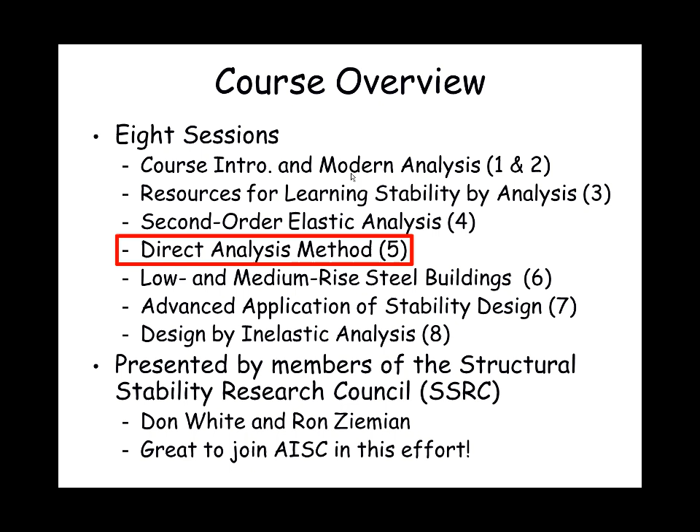In this session, we'll first focus on an overview of the key concepts associated with the AISC Direct Analysis Method. Then next, we'll review specific details of the AISC Stability Design Methods with particular emphasis on the DM. Then in topic 5.3, we'll look at important considerations related to modeling of nominal out-of-plumbness effects in ordinary building structures. We'll then focus on a specific single-story multi-bay frame example to get a better understanding of how the direct analysis method works in topic 5.4. Next week we'll look at a multi-story building frame, and then the following week we'll look at some other structures and applying direct analysis method and other methods. And then tonight we'll wrap up with topic 5.5 in comparison to test simulations with a single-story frame that we're going to study.

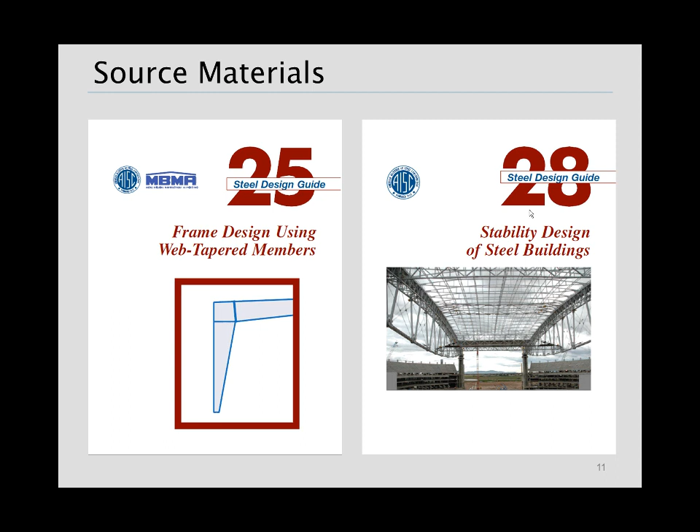Similar to last week, much of the background to the presentations comes from AISC Design Guides 25 and 28. So these are good companion reading materials. And let's get down to business with the first topic.

Chapter C of the AISC specification lists 3 sanctioned methods of stability design: the direct analysis method, the effective length method, and the first order analysis method. The first order analysis method is really the direct analysis method with embedded second order elastic approximations that are conservative up to the limits of the use of the method. So that's all I'm going to say about the first order method tonight. We'll focus on the direct analysis method and the effective length method in the remainder of the discussions. The AISC specification gives the direct analysis method as the preferred approach, and we'll try to understand why that's the case as we go along.

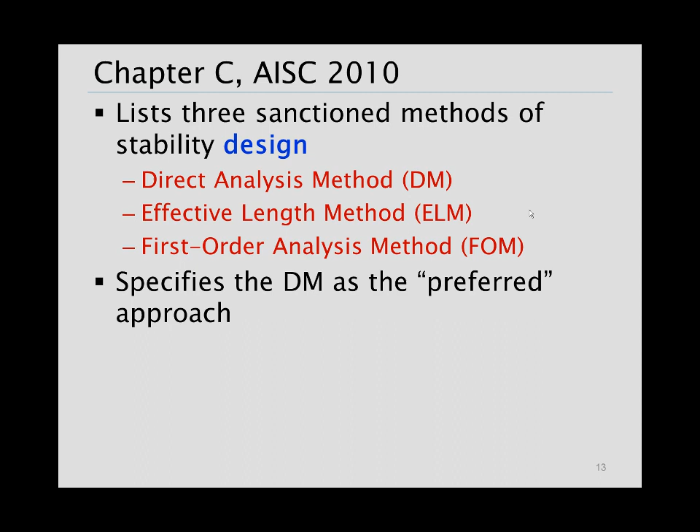First, a couple of notes about what design means. Basically, it generally means selection of a structural configuration. Also, we're looking at performing an analysis of that configuration and proportioning components. So basically, with the exception of Appendix 1, which I think Ron will talk a bit about in the 8th week, all the design methods that we're going to be looking at here have requirements for structural analysis in them, and also rules for checking of the component resistances that are tied to how we do the analysis. So basically, analysis rules and checking of component resistances always go hand in hand, and the rules for checking vary as a function of the analysis requirements and vice versa.

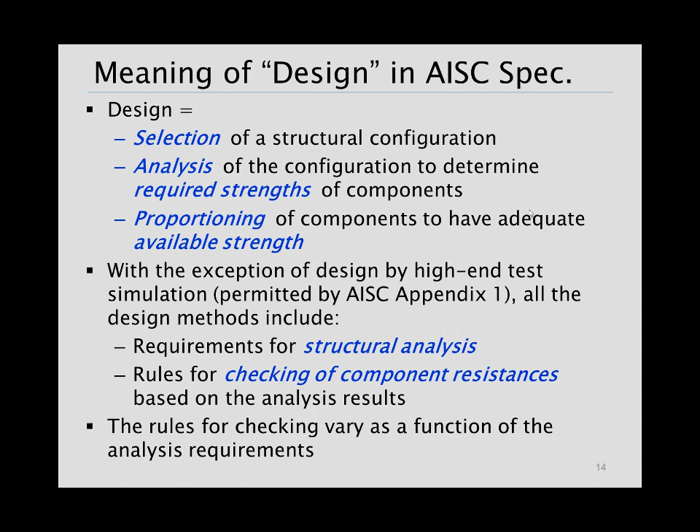So since emphasis is on direct analysis method here, what's it all about? Basically, we're looking at assessment of overall system structural stability, including effects of geometric imperfections and reduction in stiffness as we're approaching the ultimate strength limit state. And we want to do that explicitly in a second-order load deflection structural analysis.

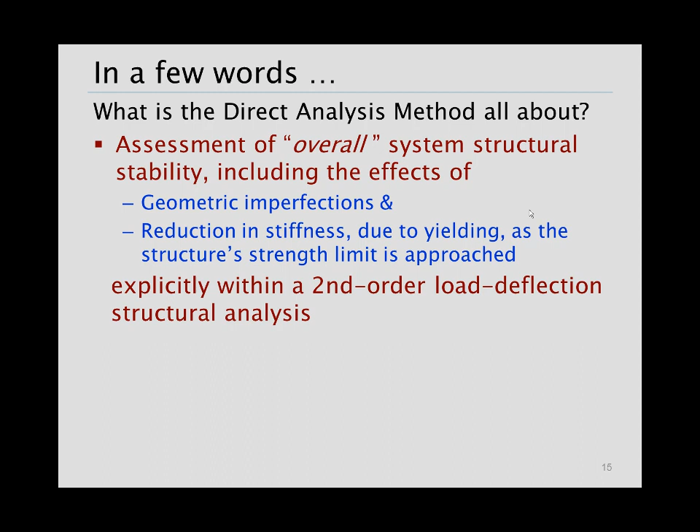Why is the direct analysis method preferred? It's generally more straightforward once you get used to it. By moving some of these considerations over to the structural analysis, we're able to simplify what we do on the resistance side, and so some of the complications associated with effective length factors and their proper calculation go away.

Basically, we take K equals 1 in all cases and treat the members as if they're braced in the resistance calculations. The direct analysis method tends to give us a better, more representative accounting of what the actual real forces are internally within the structure. And the direct analysis method is more general in the sense that we could apply it to sway frames, braced frames, combined frames. All the applications work the same way for all types of structures.

Now, 'considers' is an important operative word. Basically it means that as the engineer of record, if you've considered a particular attribute or effect and you've deemed that it's not important, you've done your job. It's gone. It doesn't mean that we have to take the kitchen sink and throw it at everything out there.

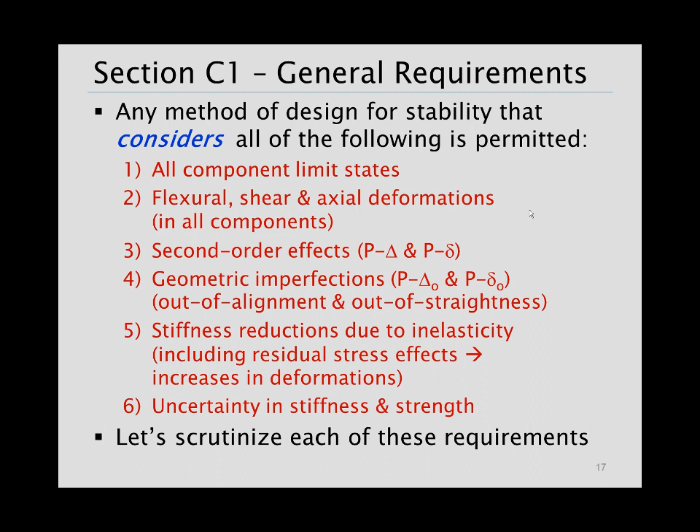Let's take a few slides and scrutinize each of these requirements. So first of all, the component limit states. Basically, we need to deal with the member axial resistance, the flexural resistance, the combination of those in the beam-column unity checks with all the members. And also when we're looking at connections, panel zones, stability bracing, we have to look at the direct limit states that are associated with modes of failure, potential modes of failure for all the components in the structure.

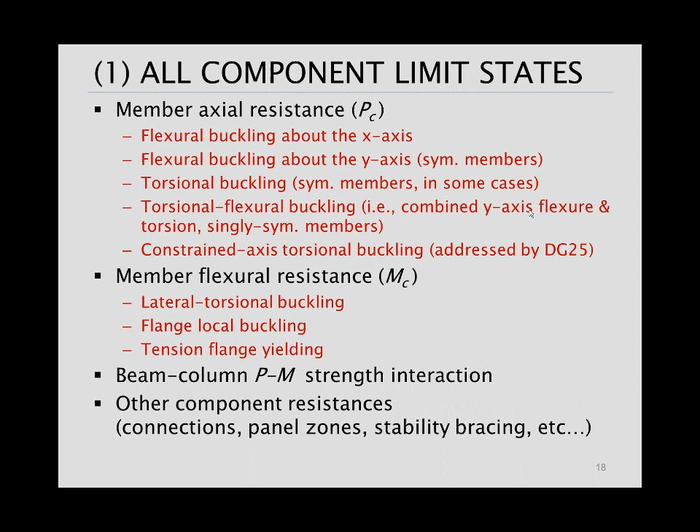There's some definitions on the subsequent slides here, similar to last week. I've embedded a number of definition slides throughout to just basically help you with grasping any of the terms that may be unfamiliar. So let's move on to slide 22.

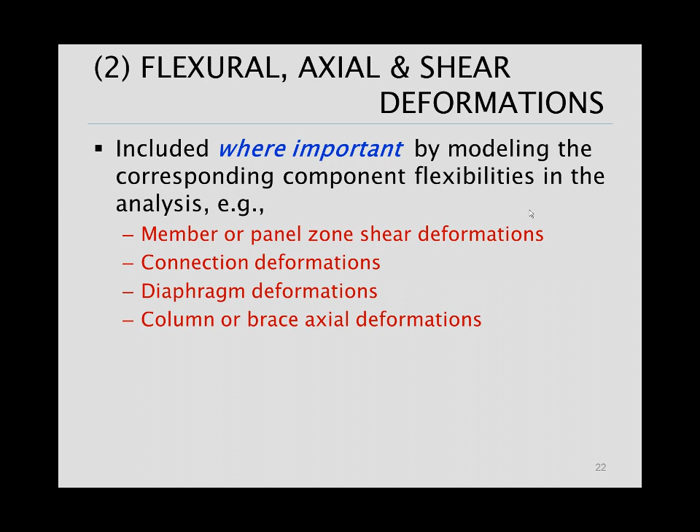Look at the second basic requirement, and that's flexural, axial, and shear deformations need to be considered where important by modeling the corresponding component flexibilities in the analysis. Again, if shear deformation is not important for the structure or component you're looking at, then you need not consider it. But if it's having a significant effect, you should.

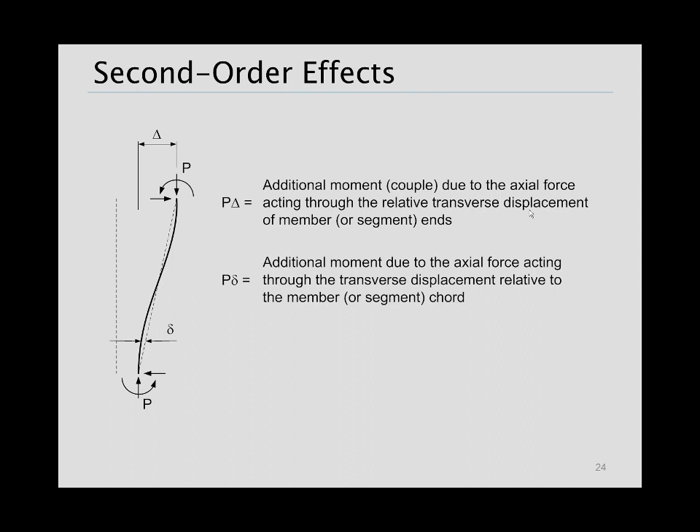We also talked about P-small-delta effects last week. P-small-delta formally we could say is the additional moment due to the axial force acting through the transverse displacement of the member due to its curvature, displacement relative to the member or segment chord. Now, any second-order analysis method is permitted by the specification as long as it's sufficient, and we talked a lot about what sufficiency means, or what we need to do to make sure we're getting sufficient results, last week.

Another important point to keep in mind when doing second order analysis: it's essential to include all gravity or other load effects that influence the structure's stability. Any loads in gravity columns, walls, etc., that are stabilized by the lateral load resisting system but aren't included in the analysis need to be included or have their effect included in some way.

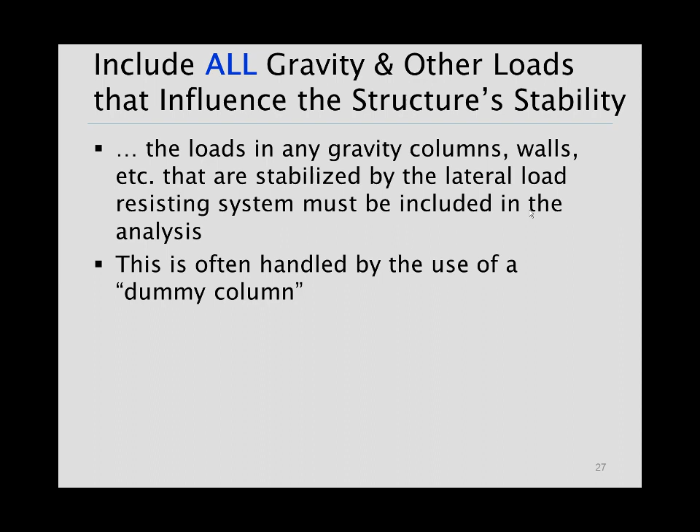This is often handled by use of a dummy column - not a stupid column, but a column attached to the lateral load resisting system of the structure. We pin it at all levels, and connect it by pin struts back to each level of the building structure. Then the total vertical loads transferred to all the columns, walls, etc. that aren't directly included in the structural analysis model get placed on that dummy column. You always want to give this dummy column enough area so you're not squashing it. That's a fairly common modeling approach to pick up all the effects of gravity columns in the structure. We won't look at a specific example tonight, but we will do some specific things with dummy columns in examples next week.

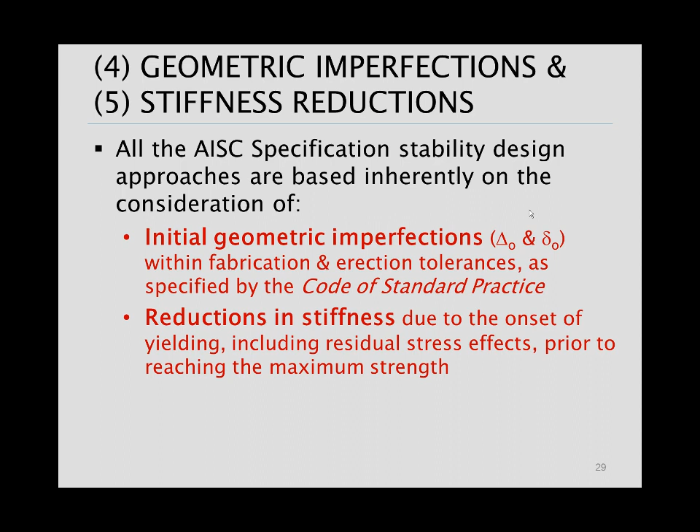About the fourth and fifth requirements from the AISC specification for any stability design method: basically any of the methods have to consider geometric imperfection and stiffness reduction effects, and all of them do. We are dealing with handling initial geometric imperfection effects within fabrication and erection tolerances as specified by the Code of Standard Practice. And reductions in stiffness are also included in all the methods.

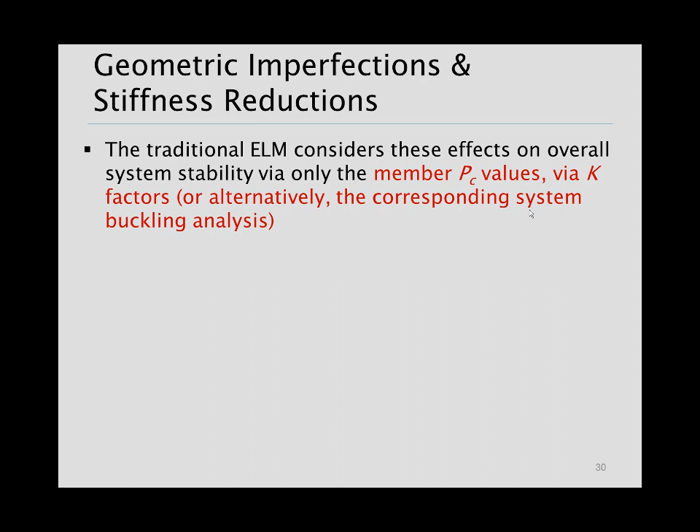In the traditional effective length method, we're handling these effects on overall system stability via only the member axial load capacities, P sub C, in the strength interaction equation, written in generic terms for ASD or LRFD. We do that commonly by calculating effective length factors greater than 1, but alternatively we can do a corresponding system buckling analysis to get the underlying sidesway buckling loads that we can map to column strength - the column strength equations with the K factors, accounting for the imperfection and stiffness reduction effects in the ELM.

This works, and it's worked fine traditionally for moment frames, but only for moment frames and only for the beam columns in these frames. In actuality, since we're only acting on the P sub C term in the beam column interaction check or column equations, there's nothing explicitly showing or handling how the imperfections or stiffness reductions impact your connections, the beams in the structure, etc.

So for design by the effective length method, the 2010 specification also requires consideration of sway imperfections - that would be an out-of-alignment or out-of-plumbness, delta naught over L of 0.002, or 1 in 500. We need to do that with gravity-only load combinations within the structural analysis.

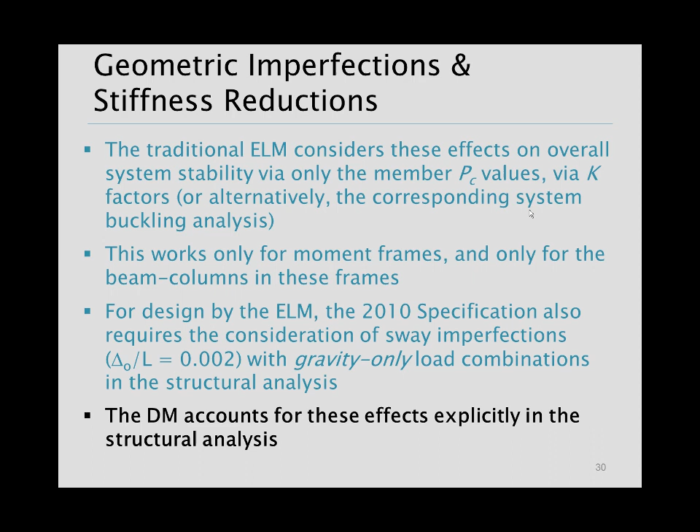The direct analysis method accounts for these effects explicitly in the structural analysis across the board. We're looking at a stiffness reduction effect that tries to handle the stiffness reductions as we're approaching ultimate strength. We're also handling nominal geometric imperfection effects directly in the analysis model for the DM.

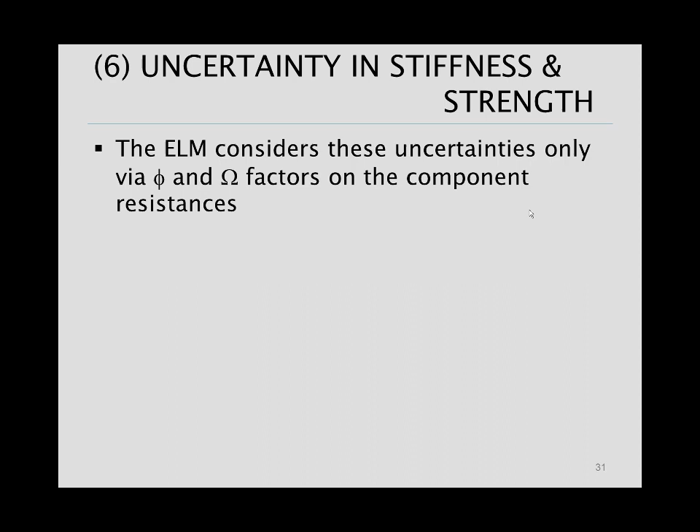Lastly, the sixth requirement is uncertainty in stiffness and strength. The ELM accounts for these uncertainties only via the phi and omega factors on the component resistances. If we go to the DM, part of the stiffness reduction we look at accounts for uncertainty in the structure's stiffness at strength load levels.

If you have a structure that's very stiff and subject to light loads, taking a stiffness reduction on something essentially rigid still leaves something essentially rigid - so there'd be a very small effect. The structure would be insensitive to the stiffness reduction and the overall second order effects. However, if you have a relatively flexible structure subjected to large vertical loads, this stiffness reduction can have a significant effect on deflections and internal forces. This characteristic is captured inherently by the direct analysis method.

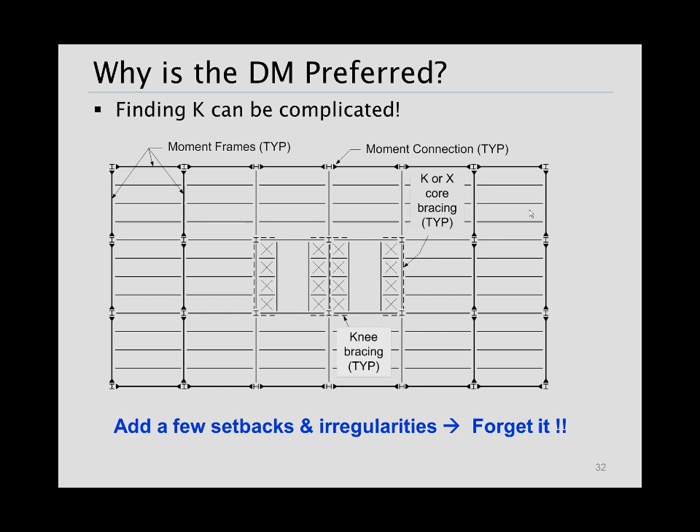Why is the DM preferred? Basically, finding the effective length factor for general building systems with some combination of moment frames and braced frames can be complicated. Even for a nice rectangular box it can be complicated, but add a few setbacks and irregularities, which are very common, and it becomes very difficult to really get it right in terms of calculating the effective lengths.

The physical behavior of even the most basic frames is really never a bifurcation problem, whereas the effective length method tends to use a theoretical bifurcation response as a base. Nothing wrong with doing that, but the direct analysis is arguably a better way.

It basically considers the fact that any structure is going to have incidental imperfections, and so that means that when you put load on it, you always get a general load deflection problem involving the loading and bending of the structure.

So say, for example, if we went in the lab and constructed a nice cantilever column on some base, and we went to load the column by a nominally concentric axial load, well, we can't build that column perfectly plumb or perfectly straight. The Code of Standard Practice out-of-straightness limit is L over 1,000 in terms of the maximum. The maximum out-of-plumbness tolerance is L in 500.

So if we have imperfections in those orders of magnitude, you load with the concentric axial load, you're going to get some bending at the base. And of course, we would want to design that base for some moment in general. So the direct analysis method is looking to calculate the influence of the geometric imperfections on that base moment.

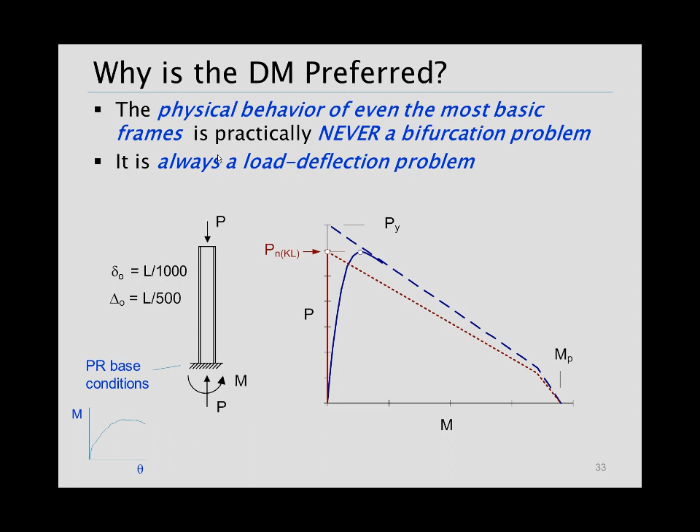With the direct analysis method, we're basically considering even this case as a beam column. Our column and our connection are subjected to axial force and moment, and by doing so, even though it's a cantilever column, we consider it essentially as braced. Some of the things we'll talk about subsequently, we could even consider just the cross-section resistance of the column, as I'm showing you here, with an anchor point on the vertical axis of PY and an anchor point on the horizontal axis of MP.

So in summary here, the basic concept of the direct analysis method: we want to estimate the required forces using a second-order load deflection analysis, and we want to account for nominal stiffness reductions at the strength levels, and geometric imperfection effects in that analysis. Once we've got our force and strength requirements from that analysis, then we are looking to check the member resistances.

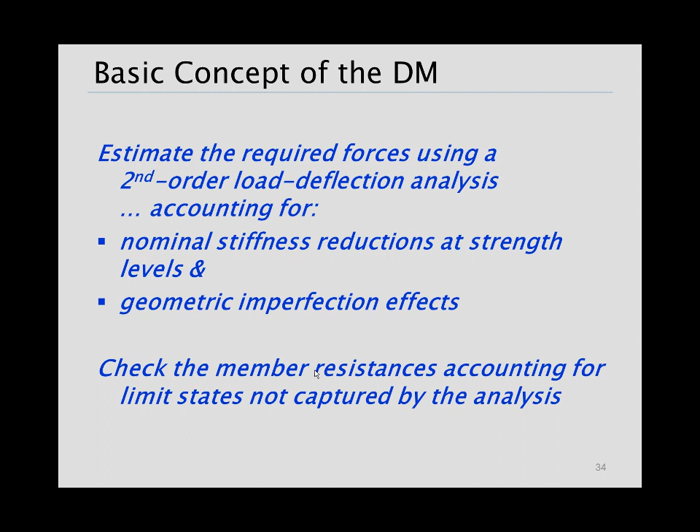And that's where we account for strength limit states. Most of the strength limit states are not captured in the analysis itself. The overall stability effects are captured in the analysis, but the different component limit states we need to capture by resistance equations.

All right, so that brings us to topic 5.2, where I'd like for us to look in a little more detail at specifics of the methods. And then once we've looked at this topic, 5.2 would be a good place we might stop for questions if there are any.

So again, not to belabor the point, but what's the primary distinction of the direct analysis method? We're looking to handle the assessment of overall system structural stability, including the effects of geometric imperfections and reduction in stiffness as we approach the ultimate strength, explicitly within a second-order load deflection structural analysis. And by doing that, that's a little more work for the analysis, but we get a benefit in the strength resistance checks that we do.

We basically don't need to use the K factor, or K greater than 1, to evaluate the sidesway resistance of moment frames. We basically look at design of the members considered as if they were braced in all our resistance calculations.

We're not covering all the bases within the second-order global structural analysis. The analysis generally does not have information built into it that captures things such as the yield strength of a material, or what the different potential failure modes are. So we need to go to our resistance equations, given the required strengths, in order to cover all the bases.

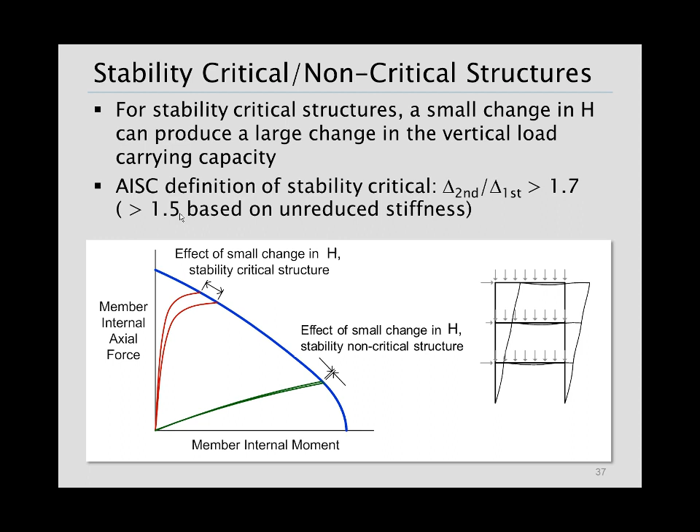The definition of stability critical is basically when the second order amplification, the second order drift over the first order drift, is greater than 1.7, if we're looking at the direct analysis method with the reduced stiffness we're going to be talking about, or greater than 1.5 with the unreduced or nominal stiffness used in the effective length method.

So for the direct analysis method, we're required to model an out-of-plumbness of L/500 for gravity-only load combinations if it's a stability non-critical structure. We can do that with equivalent notional lateral loads if we want. In addition, we're required to use a 0.8 stiffness reduction on all contributions to elastic stiffnesses.

And if we have members with high axial load, we use a column inelastic stiffness reduction factor of tau B on the rigidity of those members. You can see I'm using the same style I gave you last week, where I'm showing equation C2-2b, referencing you back to the specification where any equations I'm using show up.

Now, if we've got other materials than steel, we use 0.8E unless the code requirements for those materials have a smaller elastic stiffness.

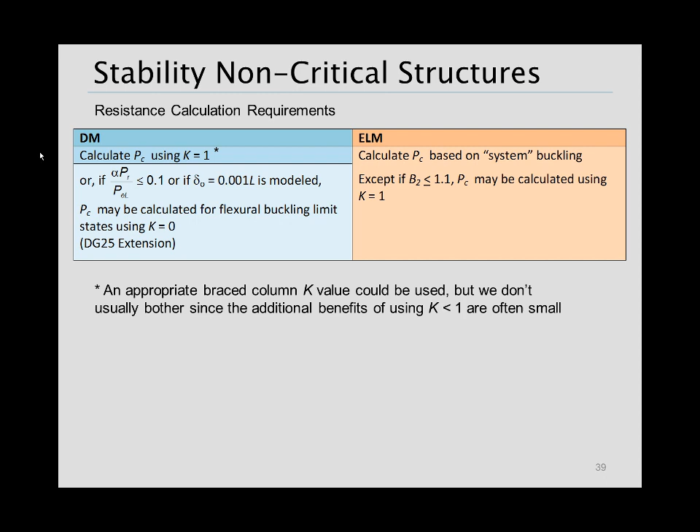A note about stiffness reduction: the elastic modulus E shows up in a lot of our specification resistance equations, often only for normalization purposes. Where it shows up for other reasons, any stiffness reduction effects are already implicitly taken into account in the specification resistance equations, so you'd never reduce E when plugging into those resistance equations.

In addition, the stiffness reduction is basically intended to account for the effects of loss of stiffness as we're approaching ultimate strength levels. That means there's no need to do that stiffness reduction at service load. Also, when we look at the load codes, response spectrum analyses, requirements, or building period calculation, those are based on nominal E, so we generally don't take any stiffness reduction there either.

Now we are required to incorporate the out-of-plumbness effect directly in all load combinations. That's pretty much the only difference there. We've now got a structure where that out-of-plumbness effect could be having a significant influence on the overall load carrying capacity of the structure, and so we need to consider it.

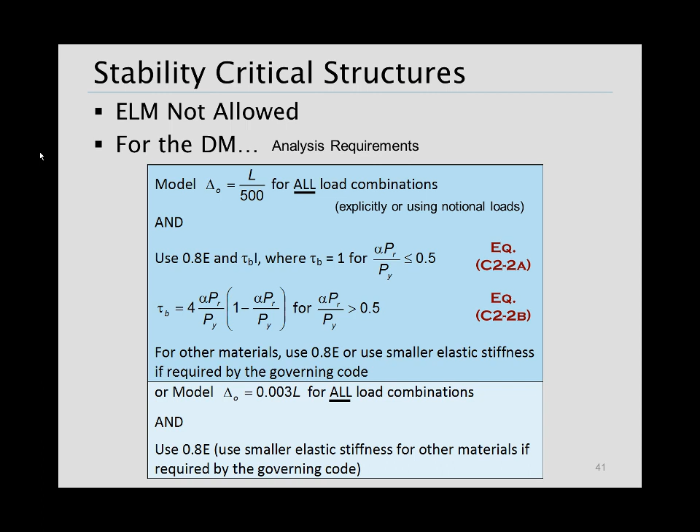As far as the analysis rules are concerned, this is exactly the same as what we had before, so the same requirements that we talked about earlier.

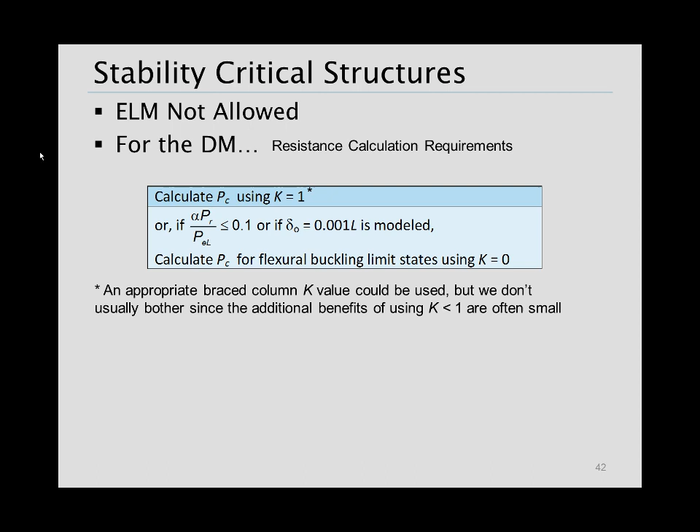Last thing in terms of wrapping up with a number of specifics of the effective length method rules and the direct analysis method rules: why do we use the column strength calculation P sub C based on the actual unbraced length L, or K equals 1, in the direct analysis method? It's important to understand this to have your head around the whole process we're working with here.

The basic reason is to capture all the bases for situations where you could have a structure you're checking where, for some reason, you have a very light column or beam column subjected to large axial loads. In that case, the rest of the structure, either braced frame or moment frame, could be stiff enough where it's essentially preventing the sway of this light member. But this light member, if it's light enough and heavily loaded enough, could essentially get crunched in a non-sway buckling mode. To cover the bases with that and keep things simple for routine analysis, we use K equals 1, or P sub C based on the actual length.

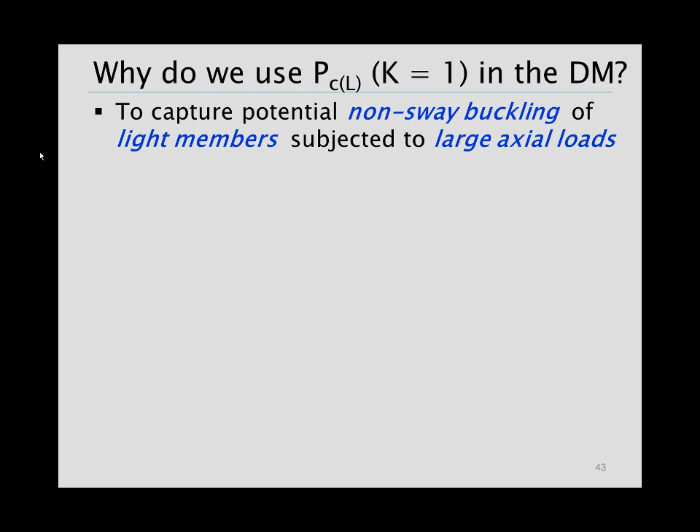Now, there's an alternative procedure from Design Guide 25 that's an extension I talked about a little bit in the tables I gave you, and some of these extensions are being considered for addition to the specification in 2016. Basically, the flexural buckling axial resistance, either PNX or PNY, can be taken as PN based on L equals 0, or in the current spec, that would be our form factor Q times the yield load PY.

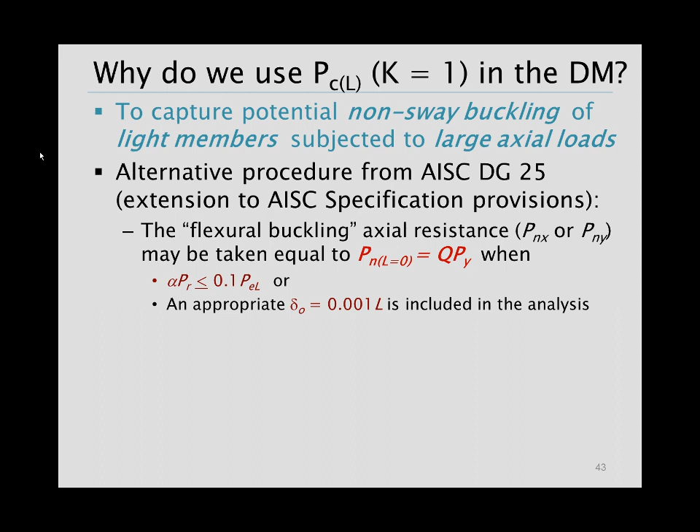This applies if alpha PR is less than 10% of the Euler load in the direction of buckling, or if an appropriate out-of-straightness is included in the analysis. That can be a bit of trouble for routine structures, so we don't usually want to bother with it there, but there are other cases where it can be very useful to do that.

Now, when it comes to torsional, torsional-flexural, and/or lateral torsional buckling limit states, we still need to do the strength checks with PN and MN using the actual unbraced lengths. The reason for that is that the direct analysis method really doesn't have the resolution to be able to capture these limit states in general.

As we were just talking about last week, most design software does not include the consideration of warping rigidity, so we're somewhat limited in being able to really do an accurate characterization of torsional, torsional-flexural, and lateral torsional buckling limit states.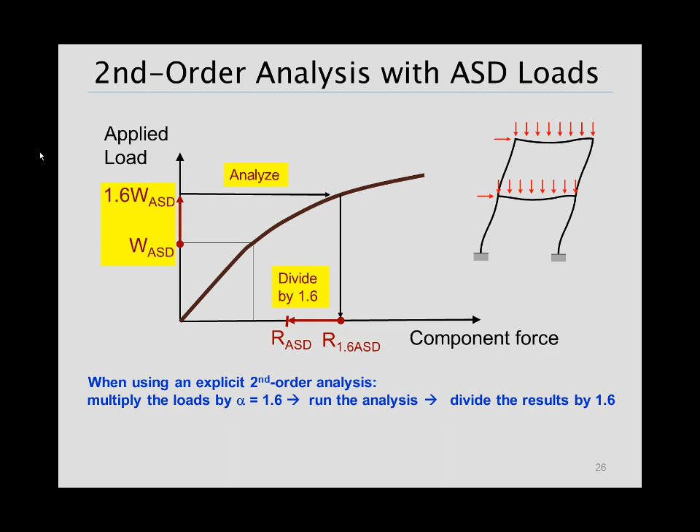Well, if you're using an amplified first order analysis, then it's not quite the same gymnastics we'd have to do with a general purpose analysis. And if you have that sort of structure, you could come back to laying out things generally. If you're looking at a structure and say, hey, I've considered second order effects, and they're negligible in this problem, as long as you're right, you're good.

So you could approach it from that sense. In the general sense, basically, if there is a measurable second order effect, we need to capture that effect at the ultimate strength load level. So that's why we have to do these gymnastics.

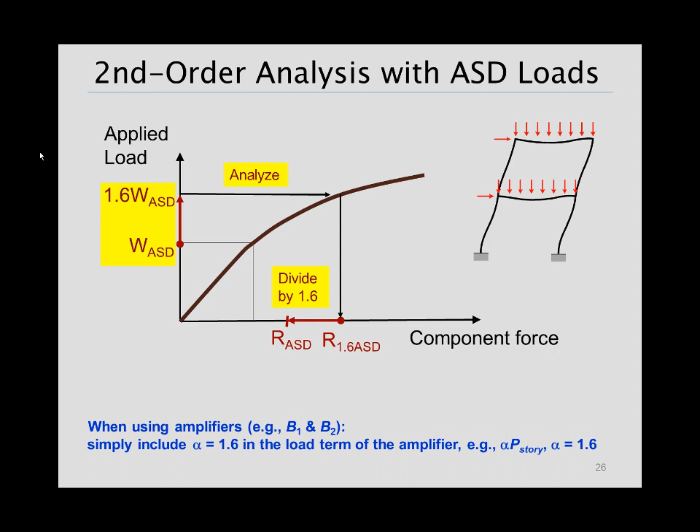Now, for the direct analysis method, are phi and omega not applied to member axial and flexural resistances? Of course. In the direct analysis method, you're basically picking up uncertainties in stiffness and strength in the application of phi or omega to the strength component terms, but you've handled the overall side sway effects in the overall analysis. So when you're looking at resistance checks, the side sway effects have already been handled, and you're looking at each component as if it's a member, as if it's braced, you could say.

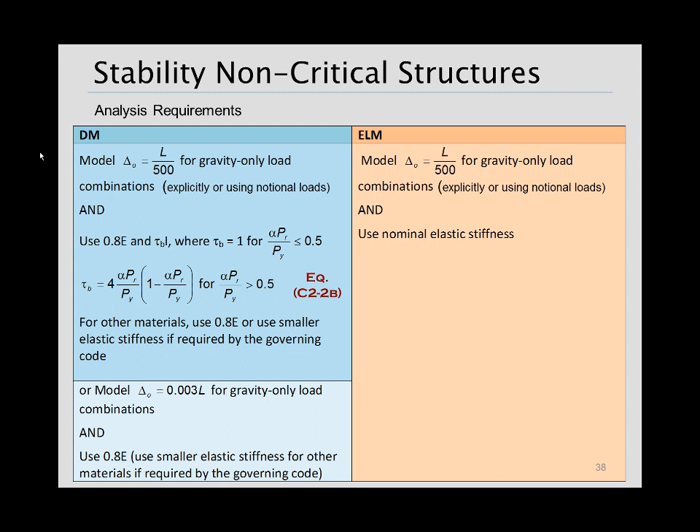The question is in regards to reducing the stiffness. Do we have to use the reduced stiffness E when calculating drift for second order analysis? Yes.

Ron used a term, and I'll probably mention it again later tonight, that the direct analysis method is kind of a poor man's test simulation analysis or test simulation check. And so that stiffness reduction is to account for the fact that as you're approaching ultimate strength limit, you are losing stiffness in the structure. It's a very coarse accounting for that effect, but it is required.

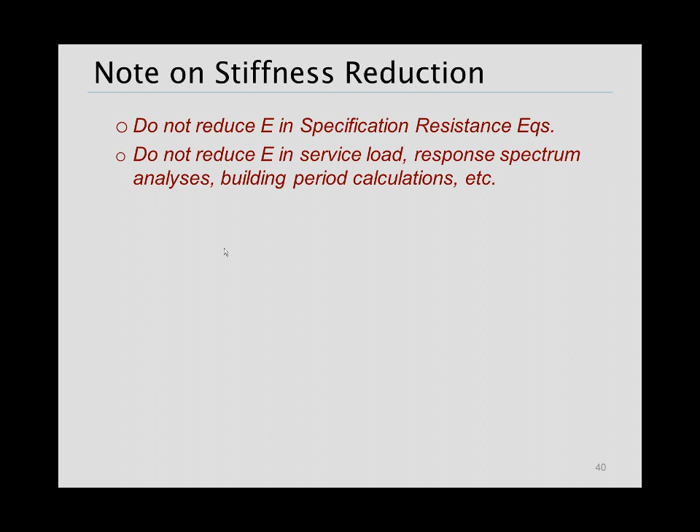So topic 5.3 basically looks to dive down in a little more detail on this one aspect, and that's the modeling of the nominal out-of-plumbness in typical building structures. That out-of-plumbness is based on delta naught of L in 500, which comes from the maximum tolerance in the AISC Code of Standard Practice.

My preference is to explicitly model that out-of-plumbness in the frame geometry, but if it's not facilitated by the analysis software, it's kind of a pain in the neck to do that. The reason I prefer this is that if there's any questions about what my notional lateral loads are, I always have to go back to the out-of-plumb structure to figure it out. So things are conceptually cleaner, easier to understand, and easier to automate in terms of programming by just canting the frame.

Now with that said, I know that most software providers prefer to use the notional lateral load. Reasons for that: notional lateral loads have been around in other international design codes much longer than in the AISC specification, so many providers already had notional lateral load generators written to service other codes. The other thing is that a notional lateral load is handled on the right-hand side of your equations for your matrix stiffness, direct stiffness analysis.

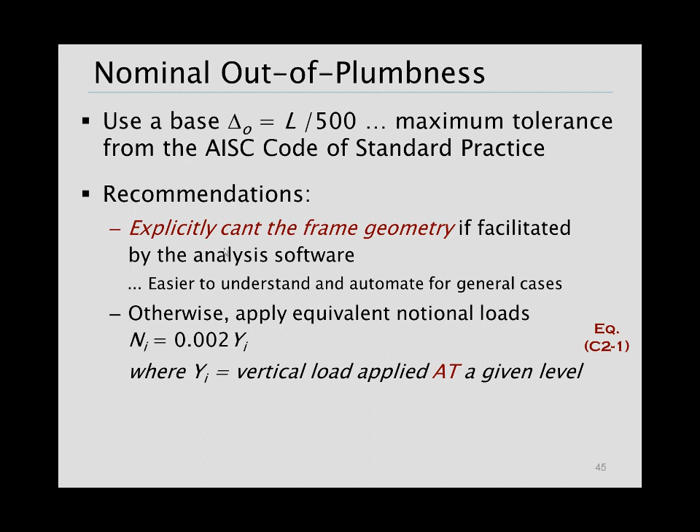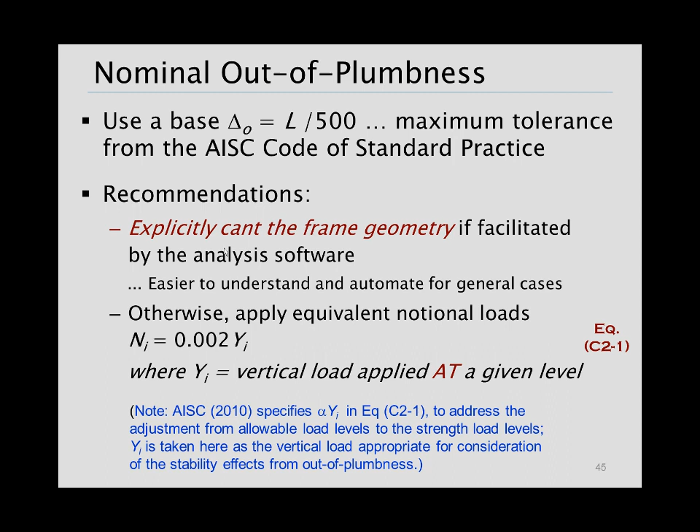Now the notional load equation is equation C2-1. The notional load is 0.002, or 1 in 500, times y sub I, where y sub I is the vertical load applied at a given level. The specification equation shows alpha y sub I, but here in my presentation and in Design Guide 28, we just use y sub I representing the load at ultimate strength that we need in the equations—so just a bit different terminology, don't let that throw you.

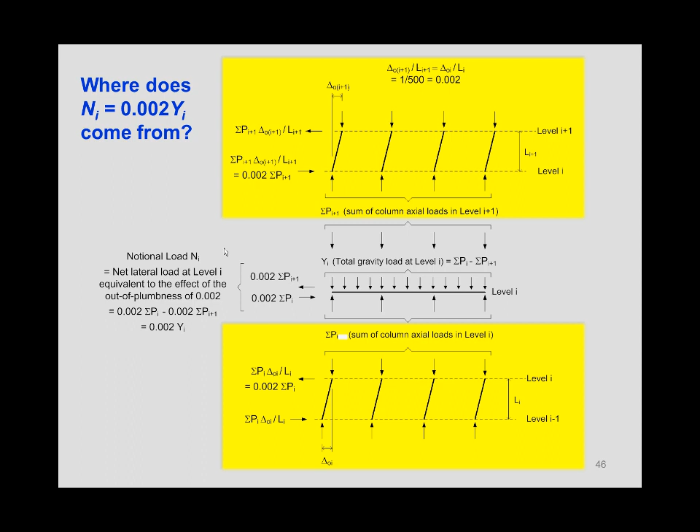Where does this notional load of 1 in 500 y sub I come from? This slide helps explain that. Basically, for a given story level, we look at the stories above and below. At the top story, if we have an initial out-of-plumbness of delta naught I plus 1, then the P-delta shears associated with that out-of-plumbness are shown here. Now if we go to the story below, same deal, but now the loads are P sub I, and suppose we've got the same delta naught over L showing up at this story as our base assumption.

Now let's apply Newton's third law—we look at equal and opposite reactions coming from above and below at the story level. If we sum those, the notional load is basically that sum. Everything cancels out so that what we're left with is just the load that comes in at this level. We use that and put it on the structure as a notional equivalent lateral load at each level.

Now, where do we put these loads? If we've got a structure with flexible diaphragms, or any case where the position of the vertical load in plan may have an important stability effect, then y sub I would be considered as the vertical load transferred to each column at a given level, and the notional load would be applied at each of those locations in the corresponding plan. So you can always go back and say, let me look at every place where vertical load comes onto the column, and put a notional load there.

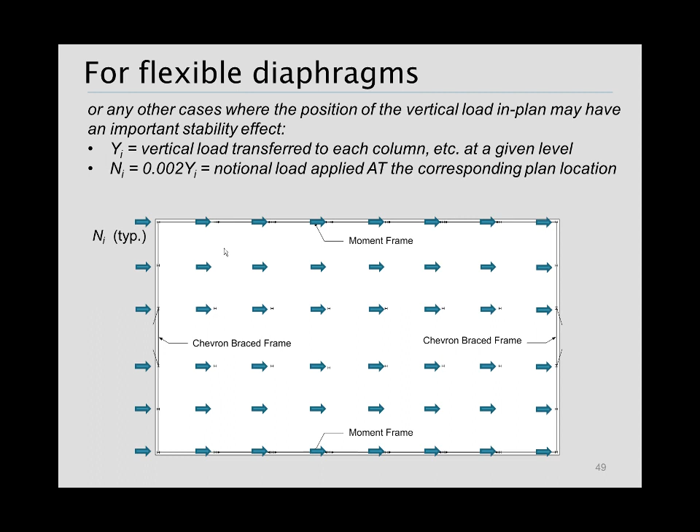It's more convenient if we've got a structure where we're allowed to model the diaphragms as rigid—just get a total vertical load coming onto the structure at a given level, and apply the corresponding notional load at the center, or centroid, of the overall vertical loading on the frame.

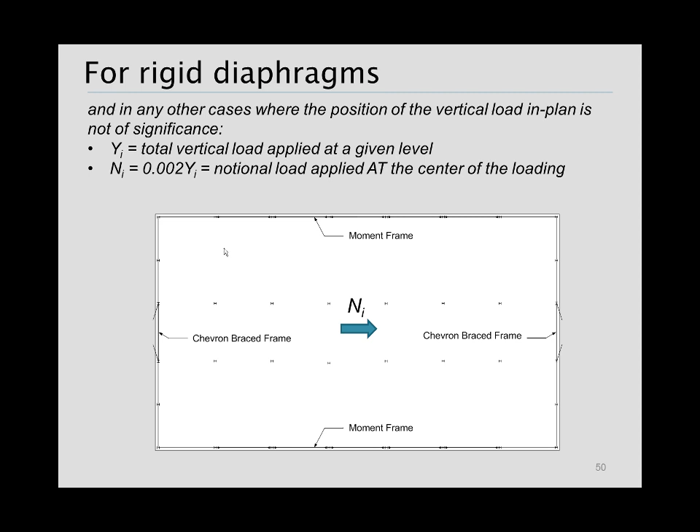In terms of what direction we apply the delta naught over L, or the notional load, the spec says apply it for greatest destabilizing effect, which isn't all that difficult, but does require some thought. We'll look at this further in the following slides.

In terms of the pattern, for structures up to about 7 to 10 stories supporting gravity loads primarily through nominally vertical columns, walls, or frames, the critical pattern is just a uniform lean of the structure, delta naught over L, all the way up the building—or the corresponding notional lateral loads that go along with that. For taller structures, Design Guide 28 has an appendix discussing how you might consider out-of-plumbness on just a certain group of stories at a time.

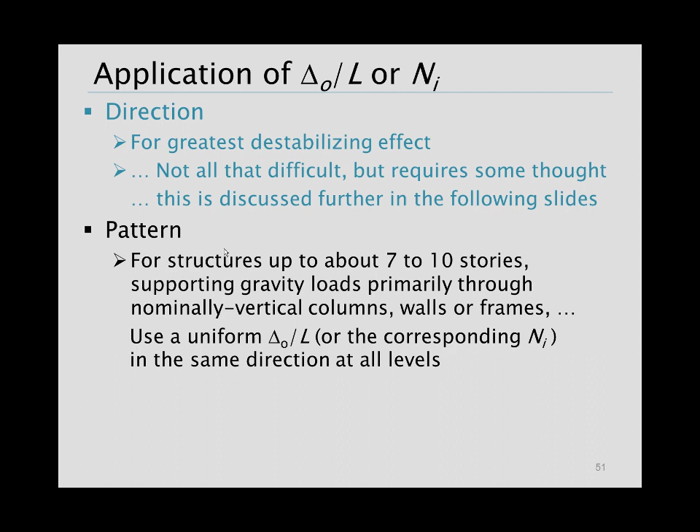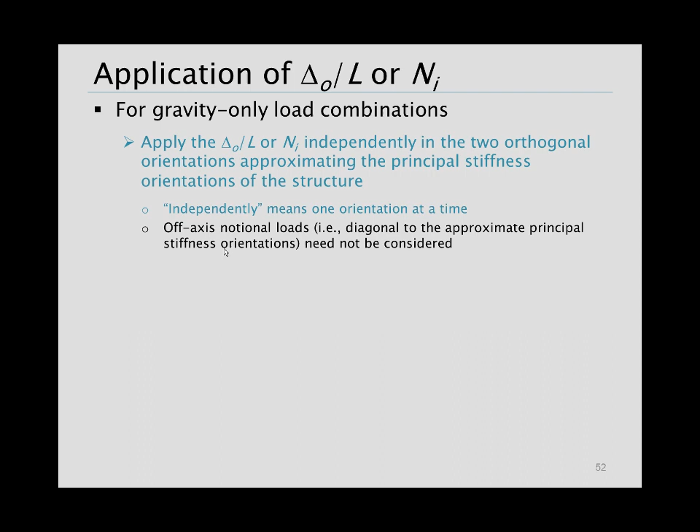What about applying the out-of-plumbness or notional lateral load for gravity-only load combinations? That's the one that shows up most, since most structures are stability non-critical. We need to apply them independently in the two orthogonal directions—similar to how we work with load codes, approximating the principal stiffness orientation of the structure. So we apply either the out-of-plumbness or the notional load along each principal stiffness direction, one orientation at a time. Generally, there's no need to consider off-axis notional loads—applying it to the principal directions is good enough.

Generally, it's considered that torsional notional load or corresponding initial twist of the structure is not required. I'm aware of one case where the design engineers did take a look at torsional notional load effects or initial twist effects of a structure. That was with Halvorson's office, where they were looking at a structure called Moscow Tower, where the overall structural system was a cruciform. Of course, a cruciform plan is going to be very torsionally flexible, so they had some concerns about potential torsional stability of the building. In that case, they did look at a torsional notional load. But in general, we wouldn't bother to go to that trouble.

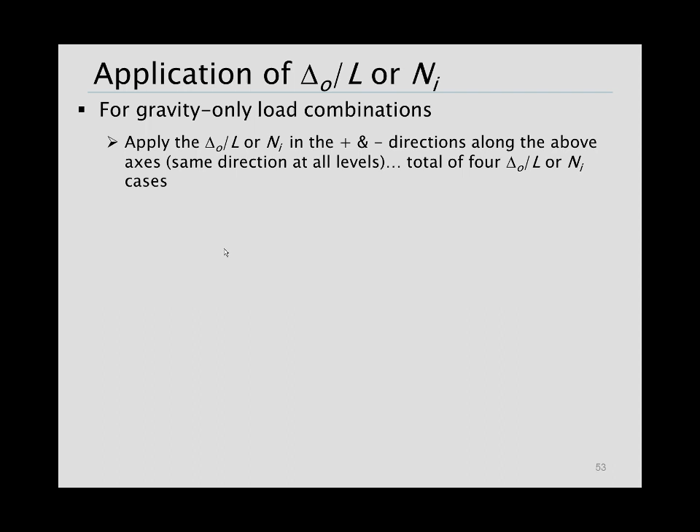Other information about gravity-only load combinations: where do we apply them, and what directions do we apply? Basically, we need to apply in the plus or minus directions along the two principal directions. So in general, the simplest thing to do is apply a total of what used to be one gravity load combination - now for each gravity load combination, you've got four. A little bit of a disadvantage there, but that's the only way to account for these effects, whether we're using the direct analysis method or effective length method, to try to get some effect of imperfections into beams, connections, etc.

Now, if you have a relatively simple case where the structure does not have any side sway under gravity load, and if you enforce symmetry in the design by grouping the design selections, then you could limit things down to just two cases, one in each of the positive principal directions. Also, if you have a case where the structure's side sway deformations are in the same direction at all of its levels, then again you could apply in the plus or minus direction that would tend to increase the net side sway in each level. So you could get down to only two out-of-plumb values, or two notional load cases, that you would need to consider.

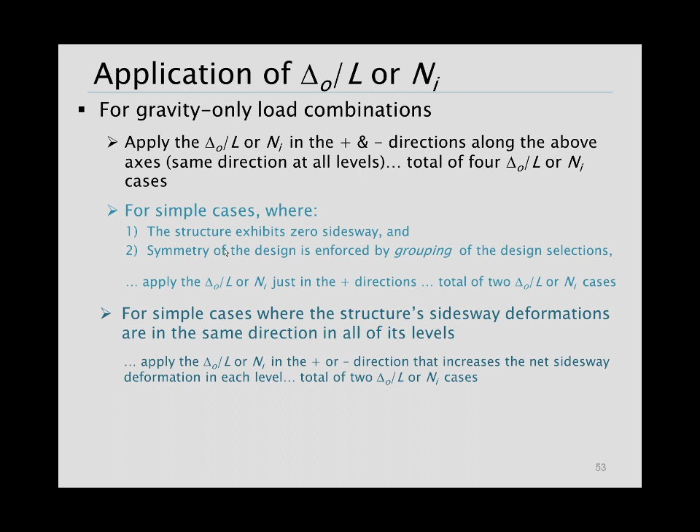Direction that increases the net side sway - that's basically the meaning of increasing the overall destabilizing effects on the structure. And overall destabilizing effects basically means that if you look at some places in the structure, you could have a particular location where putting the notional load on in one direction reduces, say, the internal moment at that location, but it's increasing the overall destabilizing effect, and that's okay. You don't have to start chasing plus and minus, or when it increases or decreases the moments or other forces at a given location - it's only the overall destabilizing effects that matter.

When we look at stability critical structures, remember we're not required to put on the out-of-plumbness or the notional load unless the structure is stability critical. Then we would apply the delta naught over L, or the N sub I, in the direction of the resultant of all the lateral loads. Pretty much as simple as that.

Generally, it's considered that we don't need to consider a torsional notional load or other corresponding initial twist of the structure. Basically, the ASCE 7 or other eccentric wind and accidental seismic eccentricity loadings are generally sufficient to address any torsional concerns.

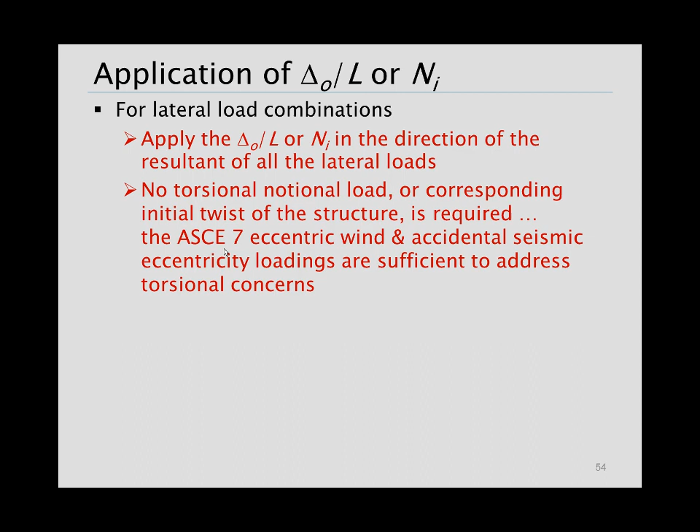Last thing in terms of looking at notional loads: if we have a gravity-only load combination, just looking at it from the mechanics, if it's only gravity load, you can't have any total net foundation shear. But often engineers are puzzled by the fact that they put all these notional loads on, and now they've got a sum of all their notional loads acting on the foundation. What's missing there is basically the way we derived the notional loading - we did not carry forward into the specification the fact that we've got a P-delta shear that is on the foundation that really we should be bringing forward and putting at the foundation. If you put that P-delta shear force at your foundation level, you'll generally get non-zero individual shear forces in a given frame, but the overall result, with those P-delta shears applied at the foundation level, will be the correct result of zero total lateral load associated with a gravity-only load combination.

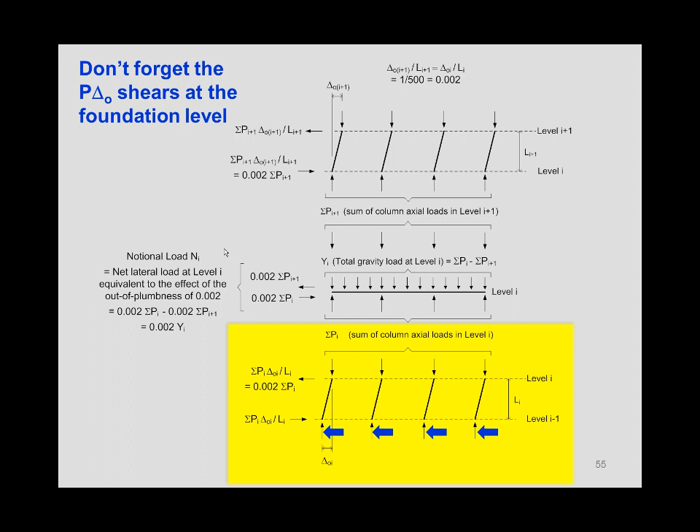All right, so let's get down to doing an example to see if we can make sense out of these different things.

The example I'd like to show you is just a single-story frame here. We'll look at a multi-story frame or building next week, and we'll look at some other examples in the week after that.

This particular frame has lateral load resisting columns just at the end columns, the outside columns on the frame. It has a roof girder that spans continuously over all the interior columns, which are relatively light columns. We're assuming that we're not making moment connections of those columns into the rafter or the roof girder. All the column bases are assumed to be simply supported, so all these interior columns are leaning columns in this structure.

The member sizes, the different span lengths, and story heights are shown here. Also, we're looking at two LRFD load combinations and the things presented subsequently involving dead load, snow load, and wind load.

The columns are braced out of plane, top and bottom. The girders, let's assume they're braced at 5 foot on center by purlins with flange diagonals to the inside or bottom flange of the roof girder where required.

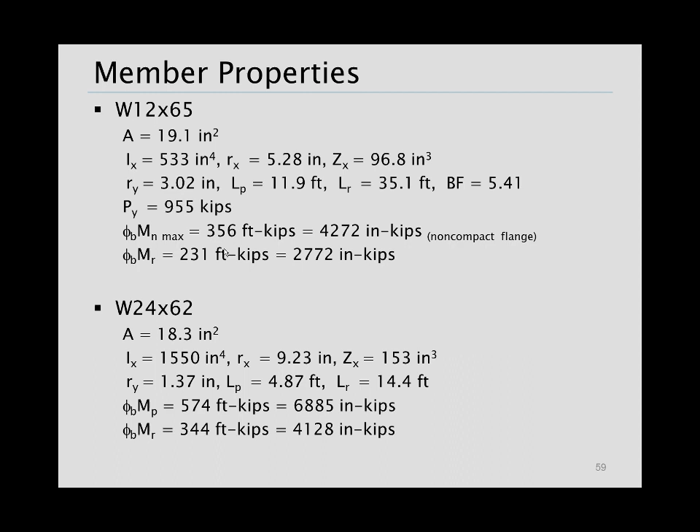Now the big picture with this particular frame: many of my students often think that a tall structure is where we get large second-order effects. It's actually not the case.

It's structures like this that are relatively squat, so there's relatively small lateral load requirements, say from wind, but we could have a wide footprint, so we have relatively large total gravity load. Also, if we have a single-story structure, a lot of times these structures don't require that we restrict either seismic drift limits or wind drift limits to small values to avoid damage to cladding or interior partitions, etc. Many times the non-structural or structural items on the structure are able to take a relatively large drift. So these structures can be fairly flexible, but with that wide footprint, we've got a lot of gravity load on a small lateral stiffness, meaning big second-order side sway effects.

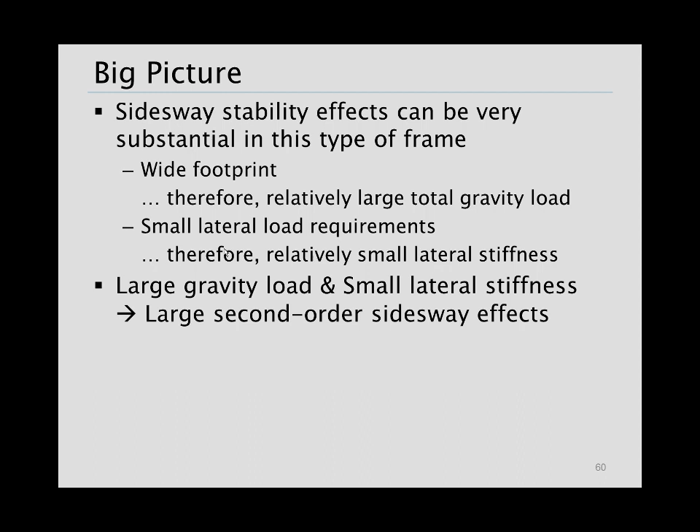Now, in what we move forward with here, I'm going to show some results, basically how we could do the calculations and pull together the first-order amplified analysis, but also compare it to what we'd get for this structure with a general-purpose analysis. The amplified first-order analysis is kind of more tedious and more of a pain in the neck, with a lot of different details.

To simplify some of those, I'd like us to look at doing just a base analysis with unit lateral load. The internal moments and axial forces due to that unit lateral load are shown here. We're going to have different lateral loads in the things that we move forward with, so what we're going to do is take these results for unit lateral load and scale them up by the actual lateral loads to get first-order analysis results for different lateral loading in the subsequent slides.

Now, one of the things we could do with that unit lateral load is assess the story side sway stiffness. So working from last week, if we do that analysis, say in MASTAN, we get a drift here under unit load of 0.2968. With the calculations we'll look at, I'm doing this with a reduced stiffness of 0.8E. Structures like this, usually the tau is going to be 1 — the axial load's not going to be nearly high enough to kick the tau factor to less than 1. So we're just assuming that's going to be the case here as we move forward.

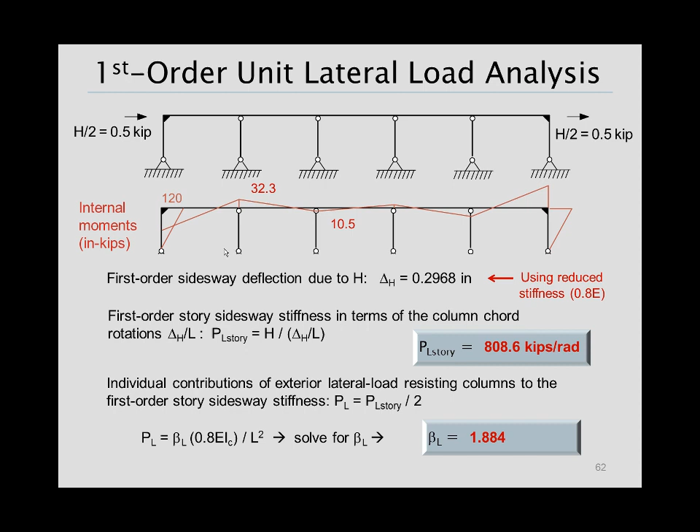We take our value, basically 404.3, and back solve for beta L. We get 1.884 here. If you remember the cantilever column case we did last week, beta L would be 3.0 for that, or here in this case if I have a pin base and if the roof girder were essentially rigid compared to the columns, we'd get beta L equals 3.0. So beta L gives us an idea of how much reduction we're getting due to the ideal case of rigid end restraint at the tops of the columns.

Now, again, to simplify some of the subsequent presentation, we don't have to do it this way, but we'll do a unit vertical distributed load on the roof girders, and here's the internal moments and axial forces from that, which will scale based on whatever the subsequent vertical distributed loads are from our ASCE LRFD load combinations.

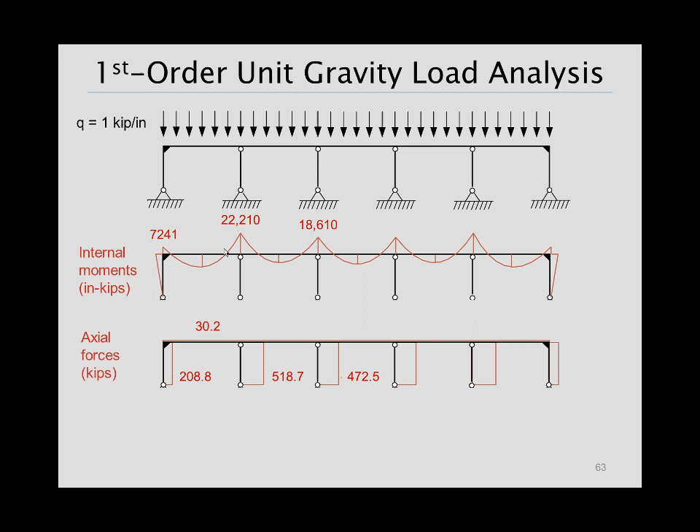Okay, let's get on to business. Let's look at load combination 1 in detail, so 1.2 dead plus 1.6 snow. We need to consider the design by the direct analysis method. We need elastic stiffness reduction. We need nominal out-of-plumbness. Let's look at doing this by what we talked about last week as the amplified story drift method to get our internal forces, MU and PU, say for design of the column. We'll compare the results from that to the AISC B1, B2 or NTLT method, and we'll also compare to general purpose analysis results.

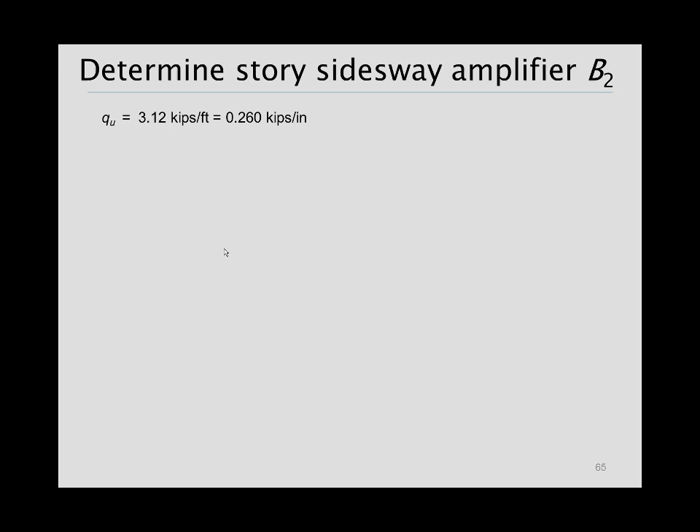So moving forward with this, basically a basic load takedown. Our distributed load for load combination 1, 1.2 dead plus 1.6 snow, is 3.12 kips per foot or 0.26 kips per inch. If we total up that load acting on 5 bays at 40 feet, we get a total story load in our LRFD load combination of 624 kips. The leeward column axial force is approximately 208.8 times this QU, working from the unit load results shown earlier, that's 54.3 kips. We need the axial load taken by moment frame columns, which is approximately 2 times PU, 109.

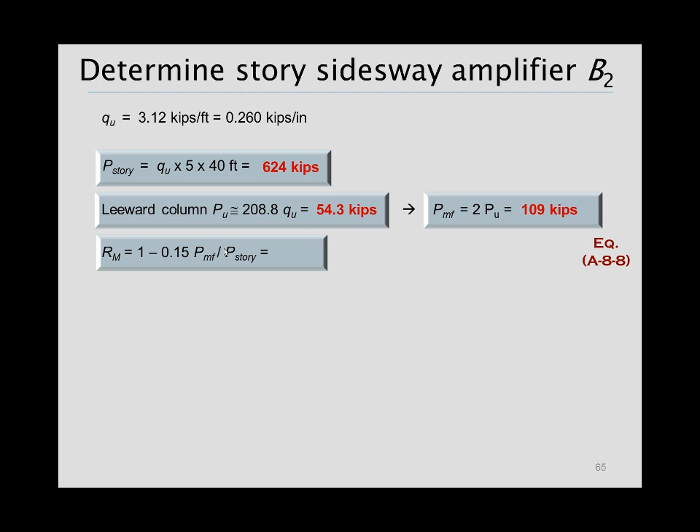So why are we doing all this? We basically need to get the R sub M factor if we're going to get the story amplifier B2. R sub M is 1 minus 0.15 PMF over P story. That's 0.974 here. Let's check our column axial load level. We kind of expected that tau wasn't going to kick in. We're well below the limit of 0.5 PY, where we would have to consider a tau factor, so tau B is equal to 1.

Let's get our story buckling load. The story buckling load, PE story, is R sub M times PL story, 787.6 kips. Again you can see over to the right here the equations from Appendix 8 corresponding to our calculations. Now the B2 factor is 1 over 1 minus P story over PE story. So we crank that out and we've got a B2, a whopping 4.814 amplification, which should kind of raise some red flags, but let's continue.

I'm giving you kind of an upper end extreme case here with this building, but you could legitimately say, given the ASCE 7 rules and the relaxation of seismic drift requirements, if the walls, partitions, etc. can take it, a fairly liberal wind drift requirement, this frame could be designed.

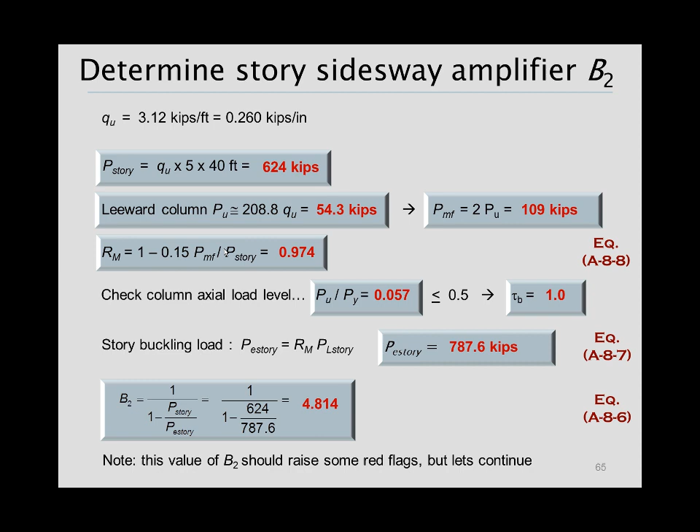All right, notional lateral load. We need that if we're going to account for the out-of-plumbness effect, and so we're going to go that direction here. So for a P story of 624, a single story frame, P story is Y sub I in our single story. That gives me a notional load of 1.248 kips.

What's the first order lateral deflection due to the notional lateral load? Now I'm looking at this on the frame, including effect of reduced stiffness. Unit load deflection was 0.2968, and so due to my notional load, the first order deflection would be 0.3703. This is basically saying by first order effects, if the frame were leaned initially by 0.002 L, or 1 in 500 of L, then you apply the loads from a first order effect, the gravity load would cause an additional 0.3703 inches of deflection.

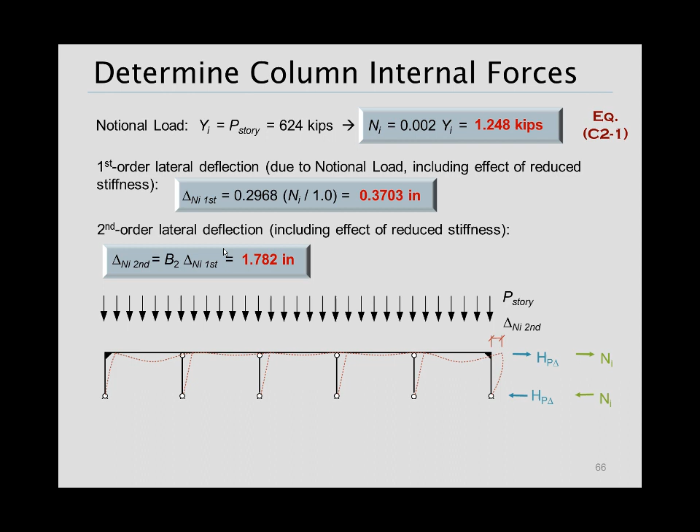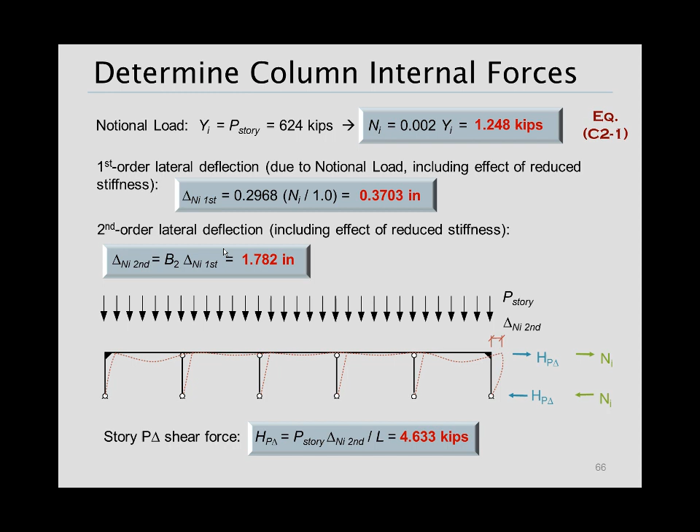But that deflection gets amplified by the sidesway amplification factor. So the actual second order amplification in this frame is 1.782 on the drift, the amplified drift. Now by the amplified story drift method, we basically need the P-delta shears, H P-delta, that correspond to this, that we're going to apply along with the first order effect of that out-of-plumbness, the notional load N sub I. Now that H P-delta is P story times the second order delta over the story height L. That's 4.633 kips, which goes on with the N sub I.

The unit load effect in terms of axial force was 0.317, so we add that. Essentially, this is an overturning effect on the leeward column, increasing our axial load on the leeward column from 54.3 to 56.2.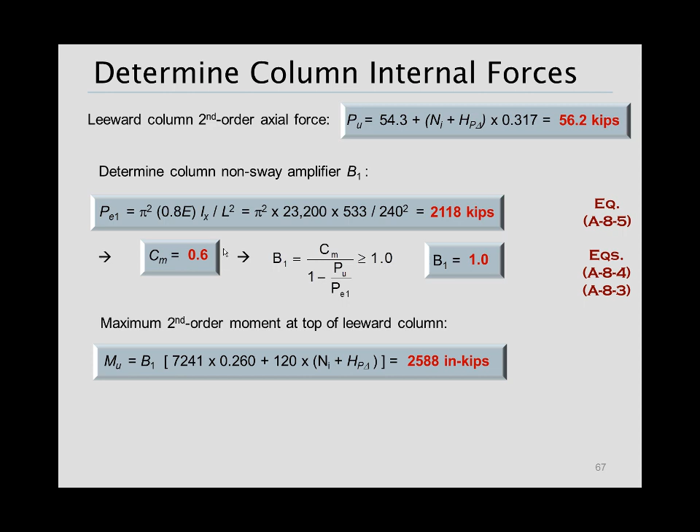If we compare to what we've got from the AISC NT-LT method, everything is summarized here. B1 and B2 are the same, and we get MU equals B1 times MNT plus B2 times MLT, in this case 2602. So very similar numbers. PU is essentially the same, 56.2 on the leeward column.

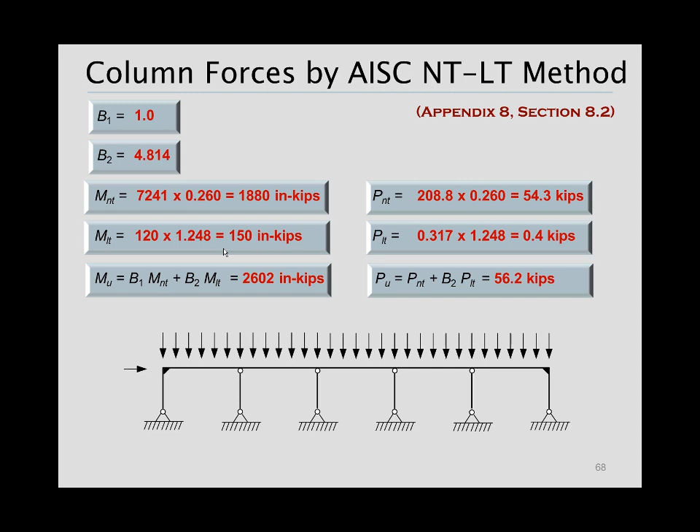If we look at the comparison to a general purpose second order analysis, and measure delta-second over delta-first at the mid-width of the frame, it's 4.515 — so not quite as high as what we estimated.

That conservatism is actually coming in from R sub m. The R sub m effect is not as high as what we actually estimated in this frame. And similarly for PU and MU, the general purpose analysis gives a slightly smaller moment and smaller axial force in this leeward column.

So you could say we could have skipped everything with the first order amplified analysis and just done the general purpose analysis. But you could also say doing the amplified first order calculation helps us get an appreciation of what's going on here.

All right, so we need to do some strength checks. The columns are braced only top and bottom out of plane, so we need to look at L over Ry in assessing their strength.

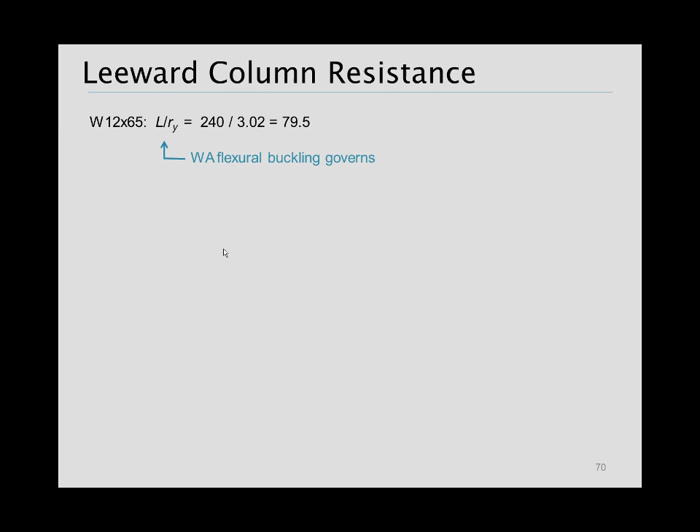FEY here, pi squared E divided by L over Ry squared, is 45.3 KSI. Notice there's no stiffness reduction in this equation.

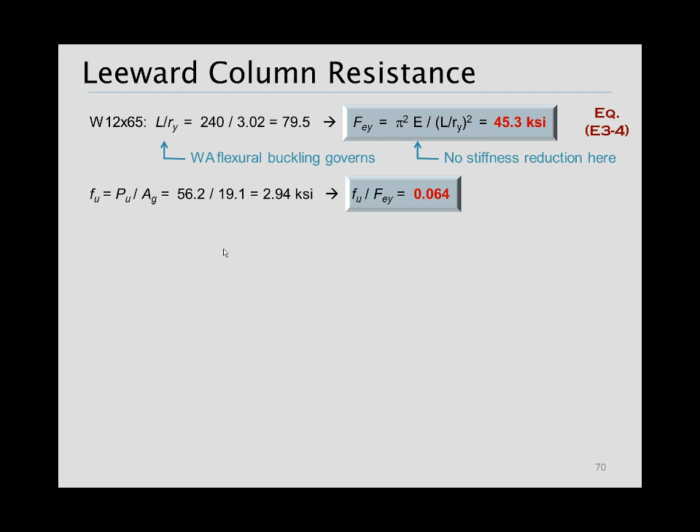Let's look at the applied axial load stress: our 56.2 over the gross area gives 0.064 in terms of FU over FEY. That's less than 0.1, so if we use the extension from Design Guide 25, we basically have a situation where the axial load is very small.

So for this kind of case, that extension is basically saying you have very little error associated with just using phi Py as your column strength. It's phi Py here because the column has a non-slender web.

So the form factor Q is equal to 1 for these columns. In terms of getting the flexural resistance, the length of our columns is 20 feet.

The columns basically have 0 moment at the bottom and maximum moment at the top. So I'm going to use an equation from the commentary that gives a slightly higher lower bound C sub B, 1.75. We have phi MP prime for these columns.

They have a non-compact flange, so 356 foot-kips, or 4272. The L sub R on this column is 35.1.

If we recognize that we're basically at an unbraced length less than L sub R, which puts us pretty close to the plateau strength of phi MP prime, the C sub B of 1.75 is definitely going to put us up on the plateau. So by inspection, we can say phi MN is phi MP prime, essentially governed by flange local buckling — phi MN equals 4272 here.

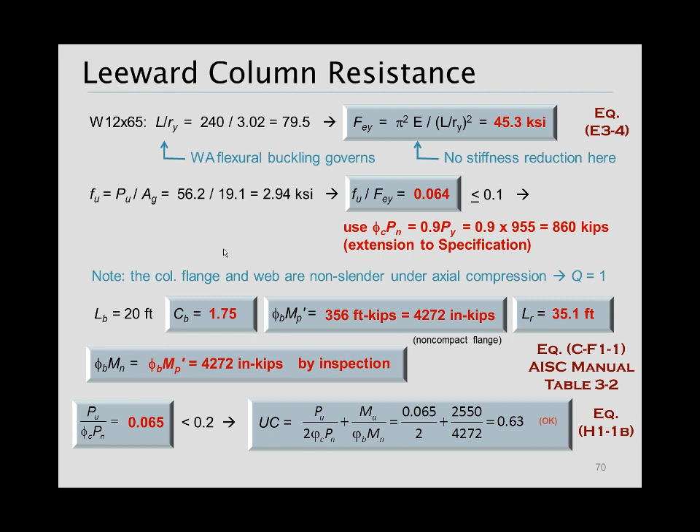Now let's do our beam column check. Pu over phi PN is 0.065, less than 0.2. We combine everything here with our moment and moment capacity, and our unity check comes out to 0.63 — so we're well less than 1.

Does that mean that now we can apply 56% more load to the structure?

No, that's never been the case. In the effective length method, though, the unity checks tend to scale close to linearly for a lot of structures. But definitely when you're using direct analysis method with a frame like the one we're looking at here, you have to be very careful not to make that mistake of assuming that you can basically say, I've got a unity check of 0.64, I've got a little extra load that got added to the structure, yeah no problem. You got to check it. You got to be very careful for gravity-only load combinations because it can be very sensitive.

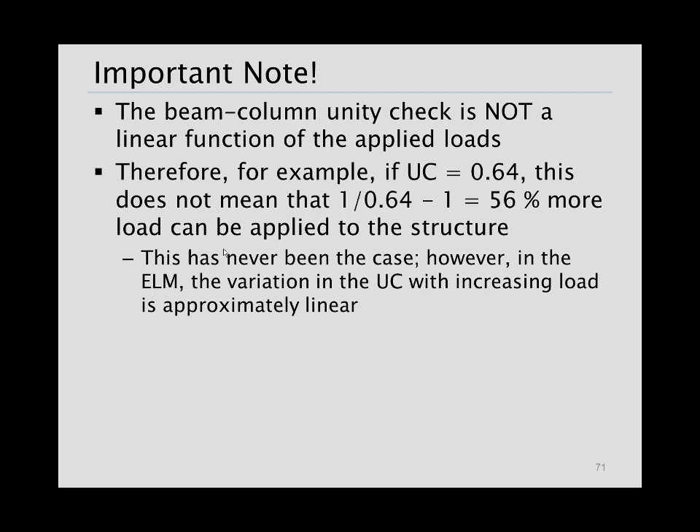And it is a stability critical frame here. There's also roof girder checks that are shown in the slides, but a fair amount of detail there. It's really just a matter of using fundamental equilibrium given the girder end forces and applied loads on the girders, and then comparing to flexural resistance checks from Chapter F of the specification.

All right, so Brent, maybe this is a good place to take a few questions if there are any again, and then we'll look to kind of wrap this up in terms of some comparisons to simulation and synthesis of the concepts. Okay, let's just take a couple questions here, and then we'll wait for the rest of the end.

This is a question in regards to an existing structure. If you are assessing the conditions of an existing structure, which method is appropriate? Is there any restriction to using the direct analysis method?

Okay, maybe take an example here. Maybe you've got a structure and you've taken some measurements, someone that basically showed you that, hey, this structure is out of plumb by more than the code of standard practice. The specification basically says, okay, hey, you don't have to use 0.002. In fact, on a structure like that, you would use what you've got. And so direct analysis would give you a more general way of checking, say if you have a situation where the structure does not meet the code of standard practice.

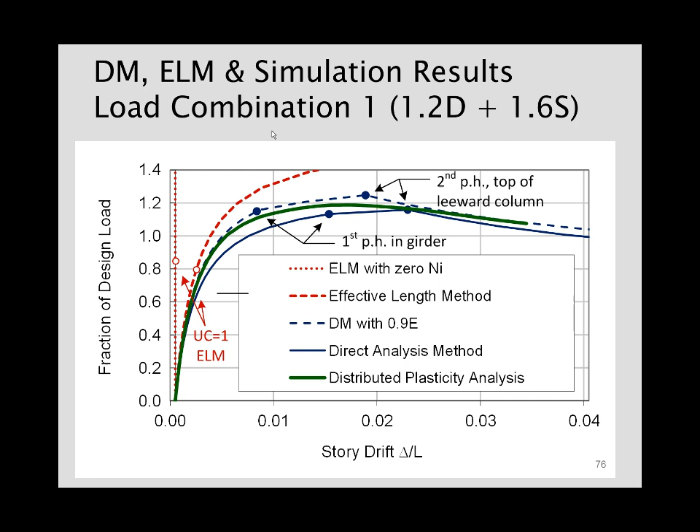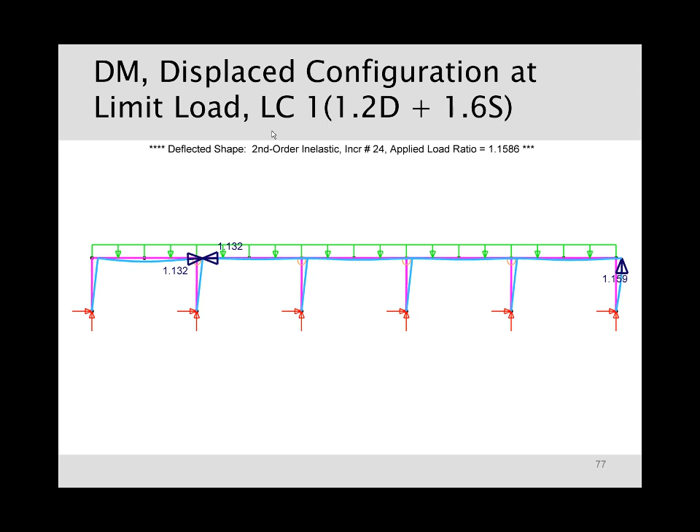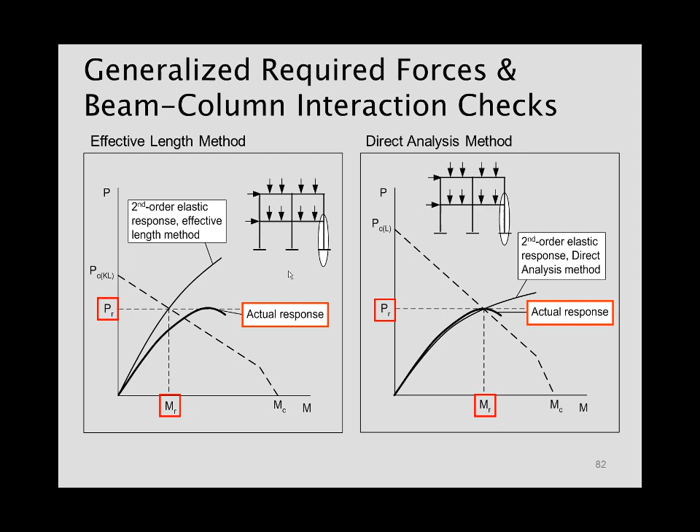And that's why we start to worry when we're using the effective length method and the spec disallows the method. Once we're getting to these sorts of frames, we can have situations where we're not really tracking very well the true internal force in our connections, in our beams, etc. And so we want to go to the direct analysis method to make sure that we're getting appropriate internal force levels.

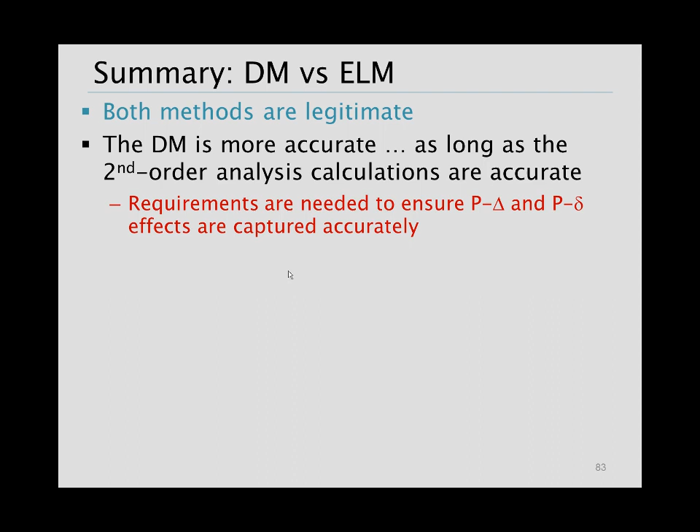So in summary, both of these methods are legitimate. You could say that the direct analysis is a more accurate representation of what the structure is really doing, as long as your second order analysis calculations are accurate. And so we need to always be mindful of the requirements we talked about last week to ensure good accuracy of the solution. The effective length method requires some additional restrictions to guard against its more limited ability to represent the actual internal forces.

That basically means the inclusion of a minimum out-of-plumbness effect for gravity-only load combinations. The traditional effective length method in prior specifications did not require any out-of-plumbness effect or notional lateral load effect, but the current specification requires, with the effective length method, we do that for gravity-only cases.

And in addition, once we get to a structure where if we're checking things based on nominal elastic stiffness, which we would use with the effective length method analysis requirements, if the side sway drift amplification, delta second over delta first, is greater than 1.5, we basically say, oops, we're either going to have to stiffen up the structure to do the calculations with effective length method, or we need to switch over for that particular case and look at making the assessment with the direct analysis method.

Okay, that's it. I hope that was useful.